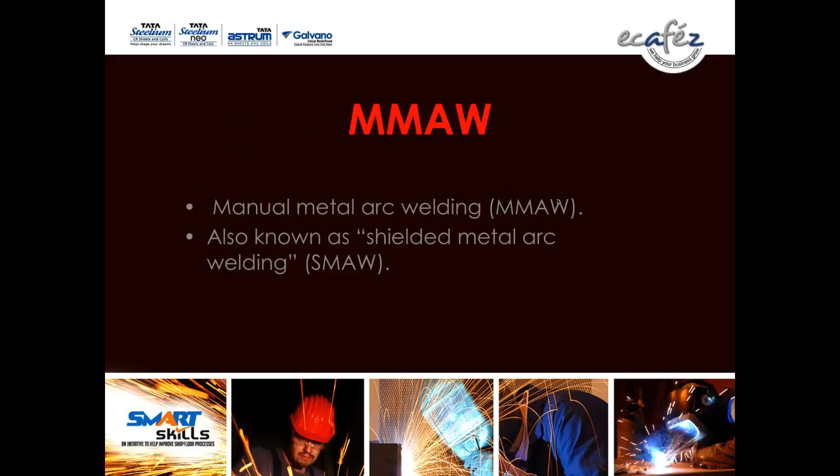Welding skill depends on four essentials of arc welding: correct electrode, correct arc length, correct current and voltage, and correct travel speed. The choice of electrode depends on the diameter of the electrode, mechanical properties of the base metal, welding position, joint type, and current value.

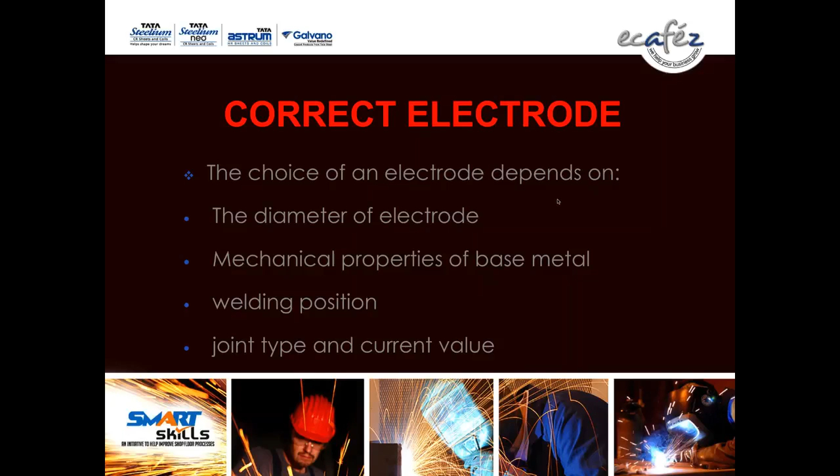Correct electrode, correct arc length. Correct arc length is very important for good quality welding, hence uniform arc length requires a great amount of skill. There is short arc and long arc; the arc length should be ideal.

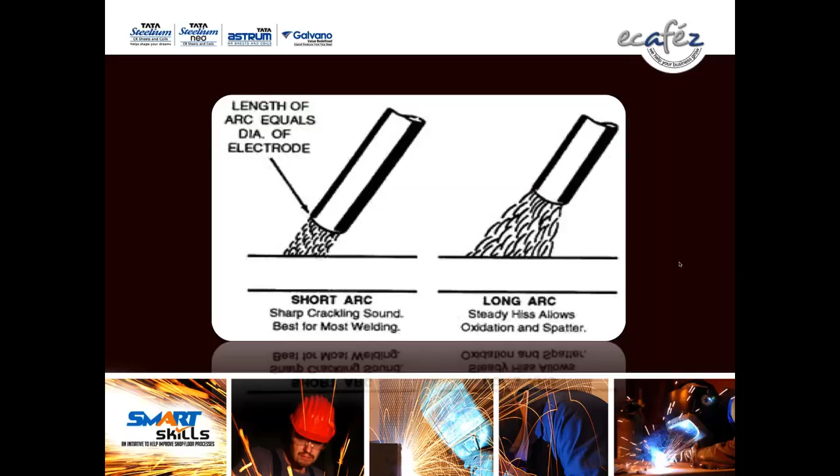With correct arc length: a short arc length reduces the voltage, therefore reduces the heat input, and results in slag inclusion and lesser strength of the weld joint. A long arc length increases the voltage, therefore results in an unstable arc, a flat weld bead with spatter and undercut.

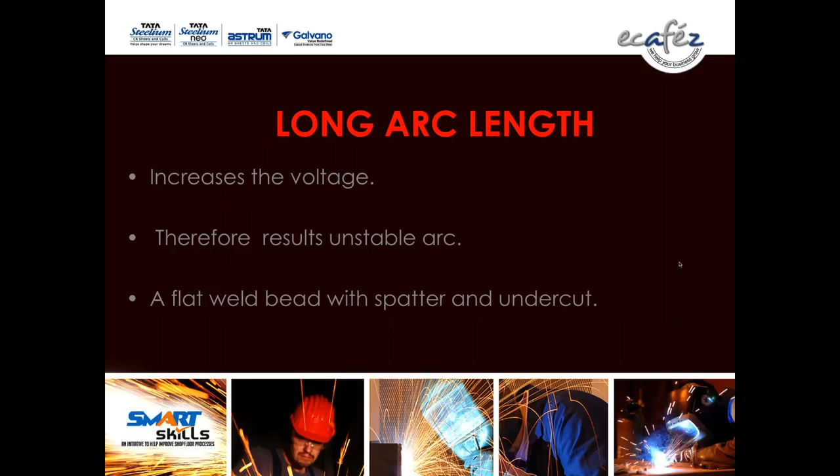If your arc length is correct, the weld joint will have a consistent profile and minimal spatter, good bead appearance, and excellent weld quality. Ideal arc length is 2 to 3 millimeters. Looking at the results: long arc length on the left side, short arc length on the right side, and in the middle the correct arc length, showing the good quality weldment by the MMAW process.

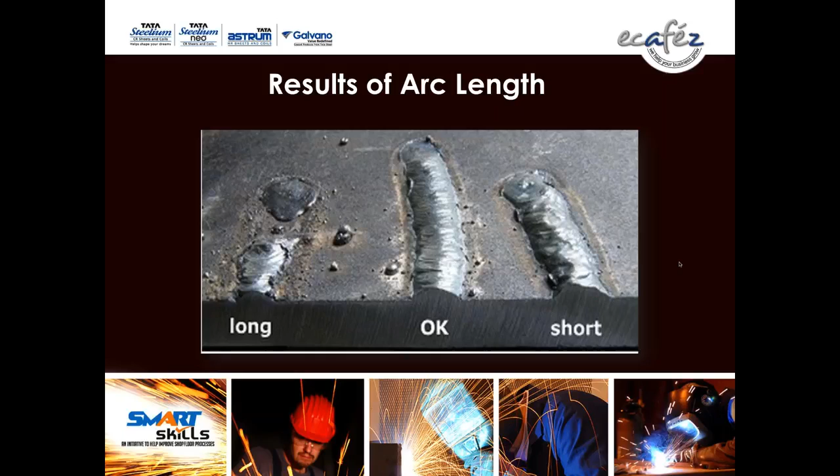Correct current and voltage: these electrical parameters are of great importance in order to get a good quality weldment, and the thumb rule for correct current setting is the diameter of the electrode multiplied by 40, plus or minus 20.

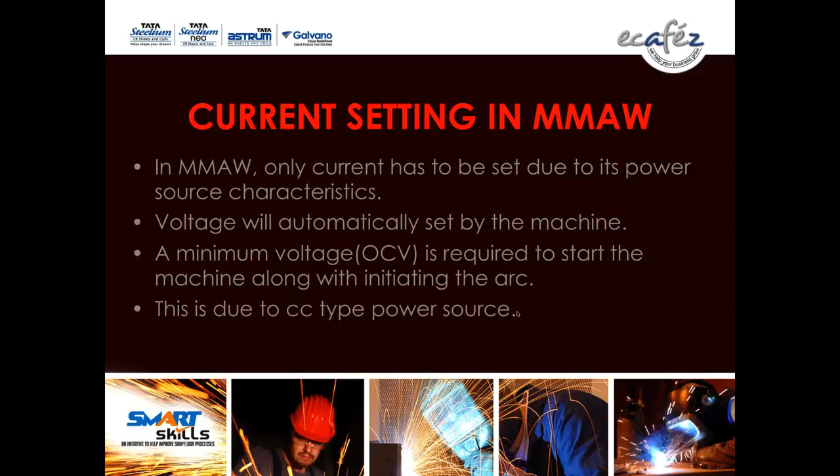Too low current setting results in a narrow bead, and the arc will tend towards one side of the weld, resulting in lack of penetration (LOP) and lack of fusion (LOF). High current setting will result in a wide, flat and irregular bead with possible undercuts. A crater will also form at the end of the joint, and slag will be difficult to remove at the edges of the weld.

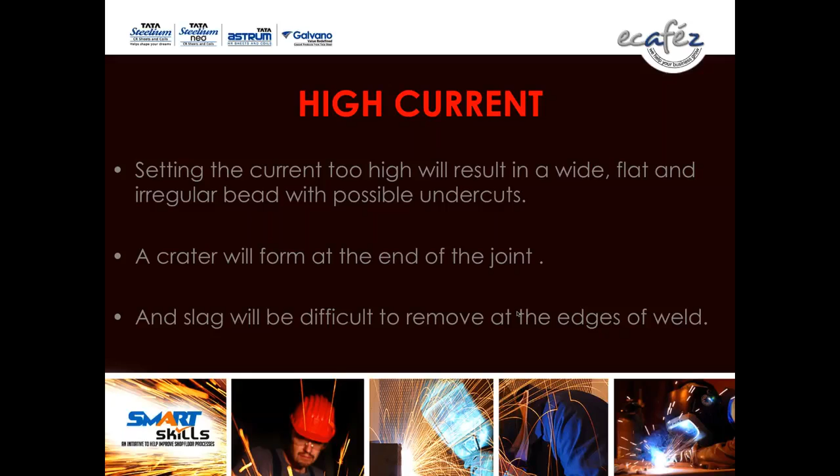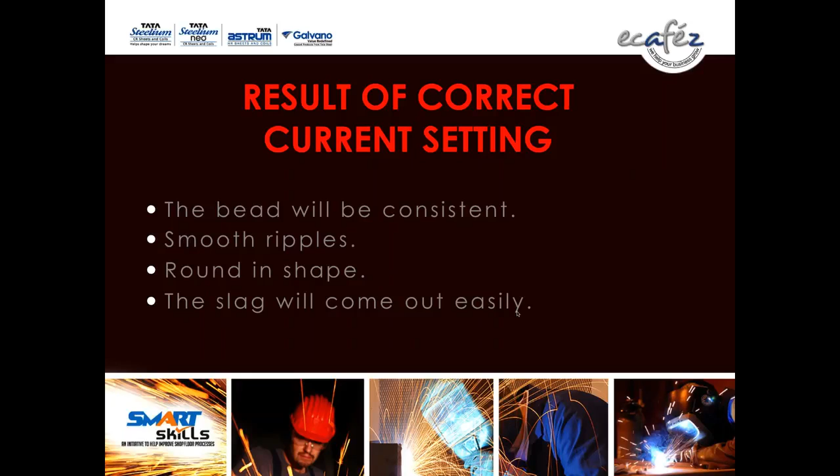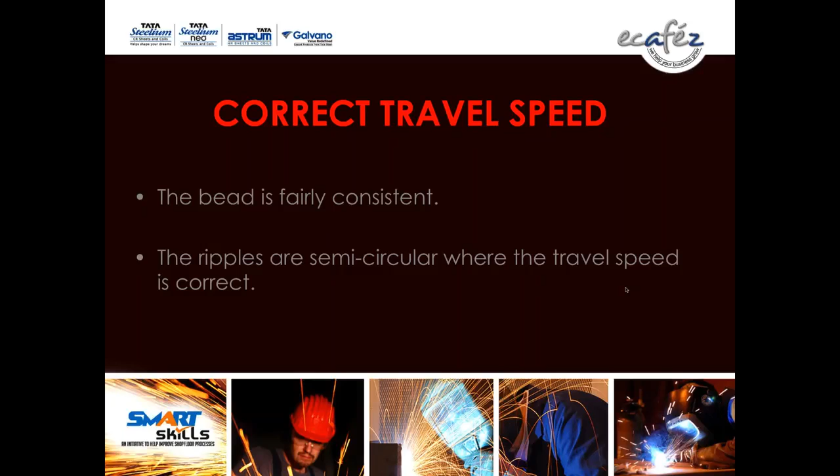Excessive travel speed results in a thin, weak bead. The ripples are elongated and triangular, and an uneven bead will occur.

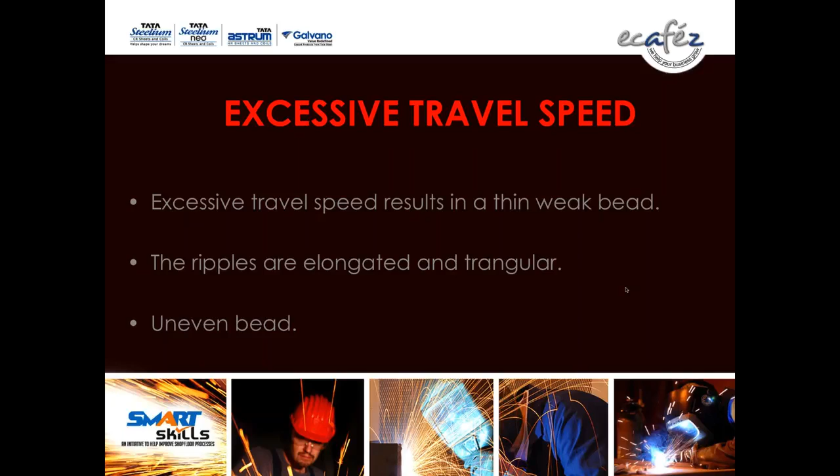Travel speed too low produces an inconsistent bead, with excessive bead height and reinforcement, and a high heat input which will affect the welding properties.

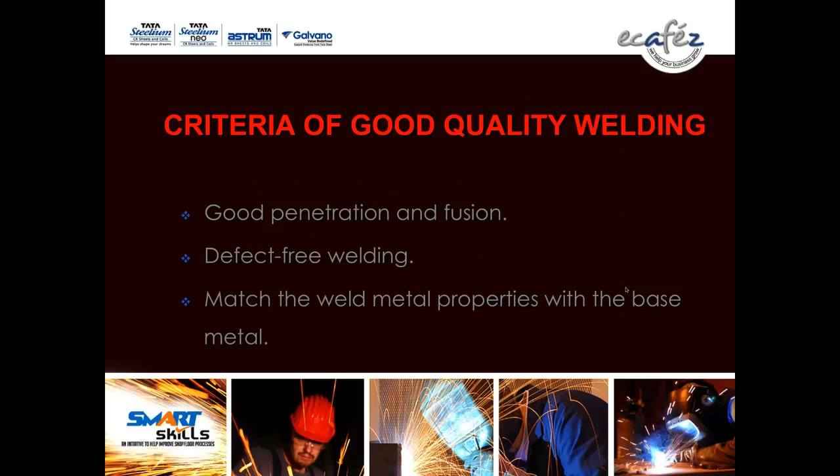Criteria for good quality welding: good penetration and good fusion, defect-free welding, and matching the weld metal properties with the base metal. For the criteria of good quality welding, see what should be the penetration for a good quality joint.

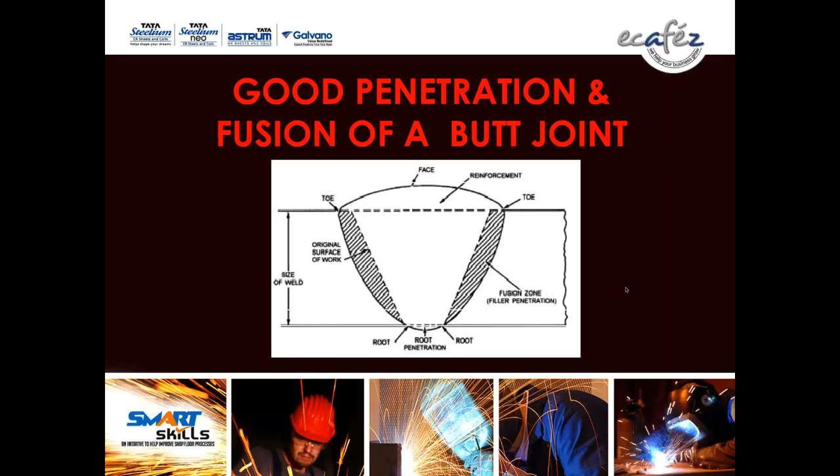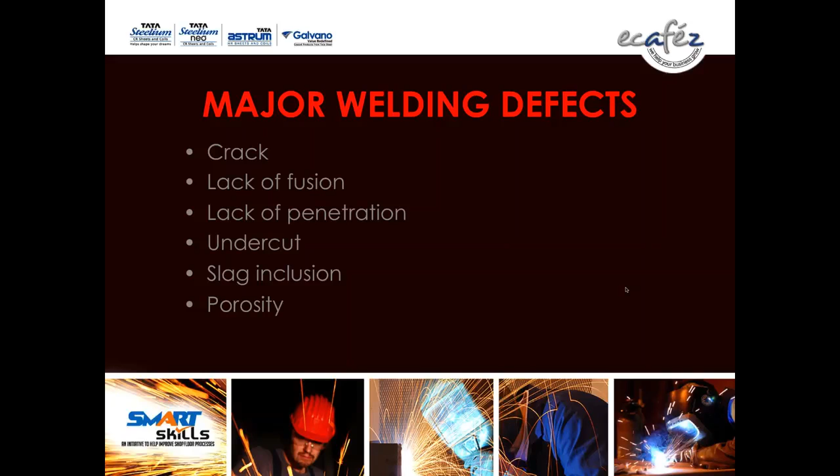Major welding defects, as I have quoted with good fusion and penetration being criteria for good quality welding: the major welding defects are crack, lack of fusion, lack of penetration, undercut, slag inclusion and porosity. These are the major welding defects.

Matching the weld metal properties with the base metal, as I have intimated to you, the quality of a weld joint depends on the matching strength of weld metal in terms of ultimate tensile strength. This is also indicated in many international codes like ASME Section 9, ISO 9606, EN 287 Part 1, API 1104, wherever you go.

Unmatched weld metal is also a reason for failure regarding the bending properties. Passing the bend test indicates the soundness of the weld. This is an example of the AWS classification of electrode.

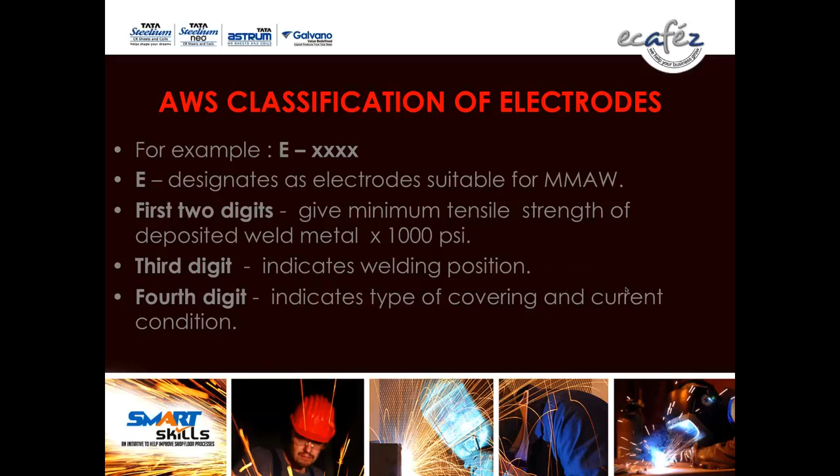It is mentioned on every quality electrode, for example E, then a dash and a 4-digit number, like 6013, 7018, 6011, 6010. E designates an electrode suitable for manual metal arc welding. The first 2 digits give the minimum tensile strength of deposited weld metal in 1000 psi. The third digit indicates welding position, and the 4th digit stands for current condition and type of covering or coating.

Check the example, AWS classification of electrode E7018. E designates electrode. The first 2 digits, 70, indicate ultimate tensile strength of 70,000 psi. The third digit, 1, indicates the electrode can be used in all positions: flat, horizontal, vertical and overhead. The last digit, 8, stands for low hydrogen powder. The coating contains low hydrogen iron powder, and the electrode should be used in DC reverse polarity and AC also.

See the last digit. What is the meaning? If the last digit is 0, high cellulose sodium, and can be used in DCRP, DC reverse polarity. If the last digit is 1, high cellulose potassium, and should be used in DCRP.

If 2, high titanium sodium, it can be used in AC and DCSP also. If the last digit is 3, high titanium potassium is the coating, and this electrode can be used in AC, DCSP and DCRP also. If the last digit is 4, iron powder titanium, it can be used in AC, DCRP and DCSP also.

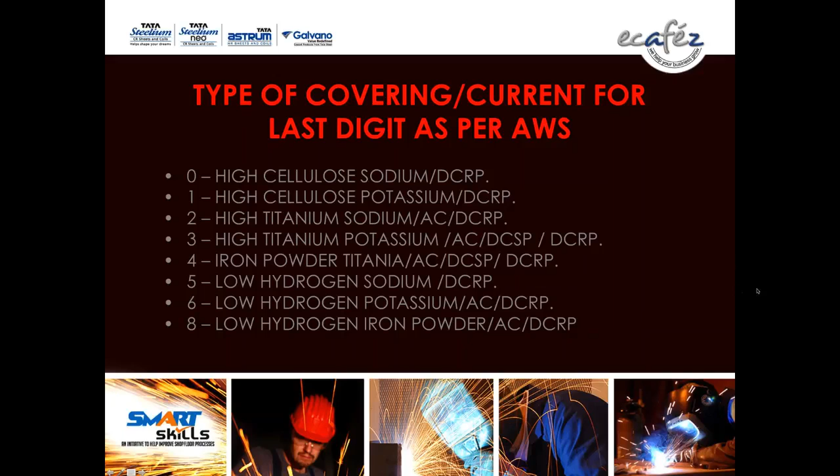Is there any question? What is the reason for short filling? Does current setting change with the change in metal thickness? Yes, it is. It depends on the thickness of the material.

Major welding defects, its causes and prevention. Major welding defects are crack, lack of fusion, lack of penetration, undercut, slag inclusion, and porosity.

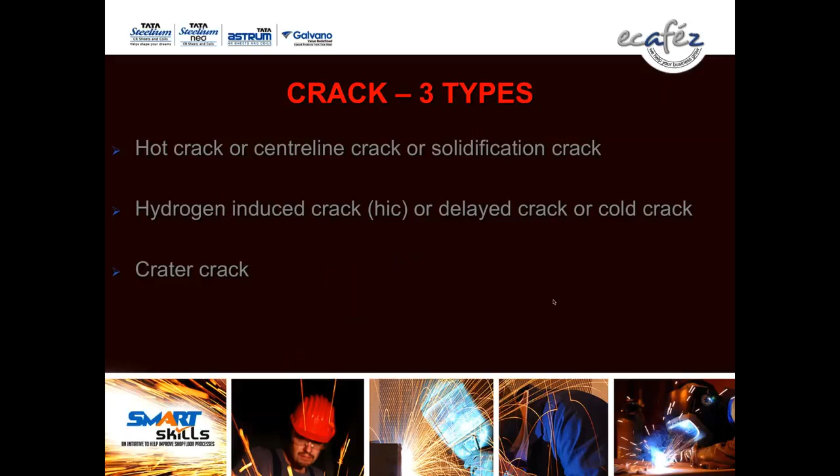Crack may be of three types: hot crack or center line crack or solidification crack. Number two, hydrogen-induced crack, delayed crack, or cold crack. Number three is crater crack.

Causes of hot crack: depth width ratio either too small or too large, high sulfur or carbon content, large root gaps, high heat input.

These are the pictorial views of hot cracks. You see the transverse cracks, toe cracks, underbead cracks, root cracks, and longitudinal cracks or solidification crack.

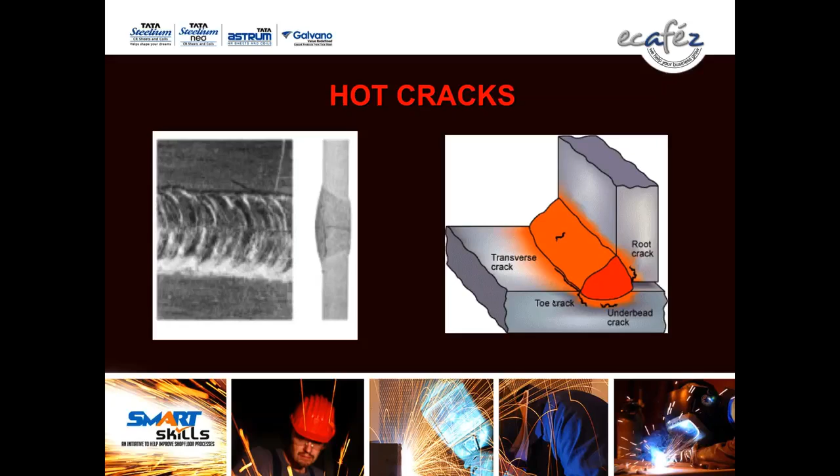Prevention of hot crack: depth width ratio of a butt joint should be 1:1.4. Reduce sulfur or carbon content. Control fit-up to reduce the gap. Reduce arc energy. If you do that, hot crack will be prevented.

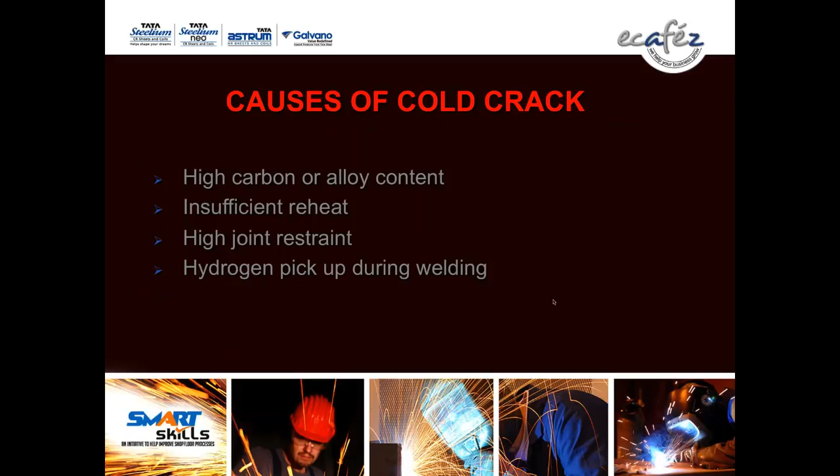Prevention of cold crack: reduce the carbon or alloy content, use preheat, reduce joint restraining, particularly in thicker material, redrying the electrodes. Let's check the question.

The CC type, number one. Yes, the CC type power source stands for manual metal arc welding and TIG welding. CC type, constant current type power source. These are involved in TIG and manual metal arc welding.

Next. Yes, we will be coming for the welding of galvanized steel at the last, at the end. We'll show you.

Why are these cracks observed in MIG welding? So we'll be coming for the MIG process also.

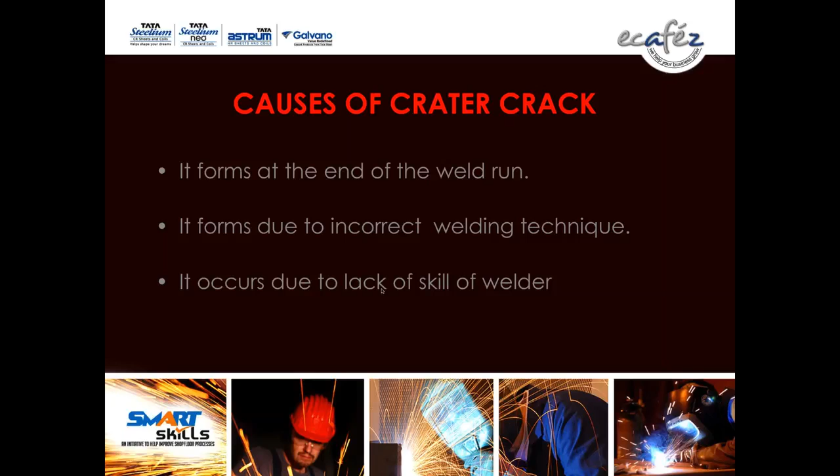Causes of crater crack: it forms at the end of the weld run. It forms due to incorrect welding technique, it occurs due to the lack of skill of the welder.

Prevention of crater crack: to properly weld, the crater should be filled before breaking the arc. This is done by reversing the arc travel direction before breaking the arc. Deposit more weld metal before withdrawal of the arc.

The strength of the weld joint, under any conditions of loading, will be very seriously reduced by the presence of this type of crack in a weld. Under no circumstances should this fault be permitted. There is another question.

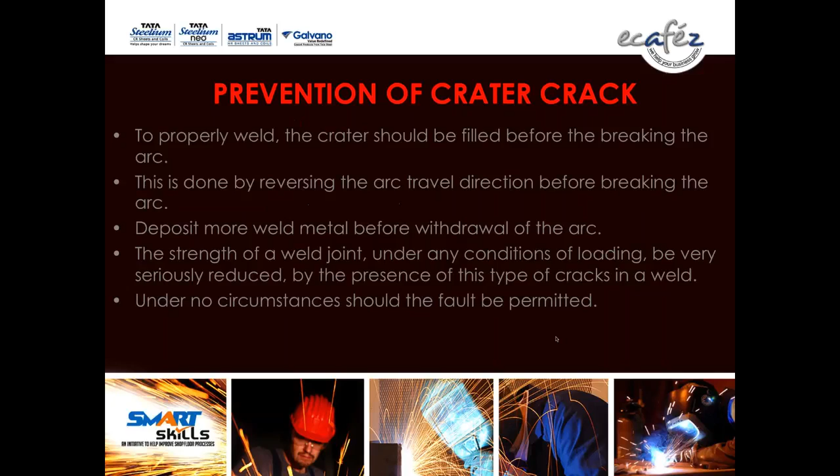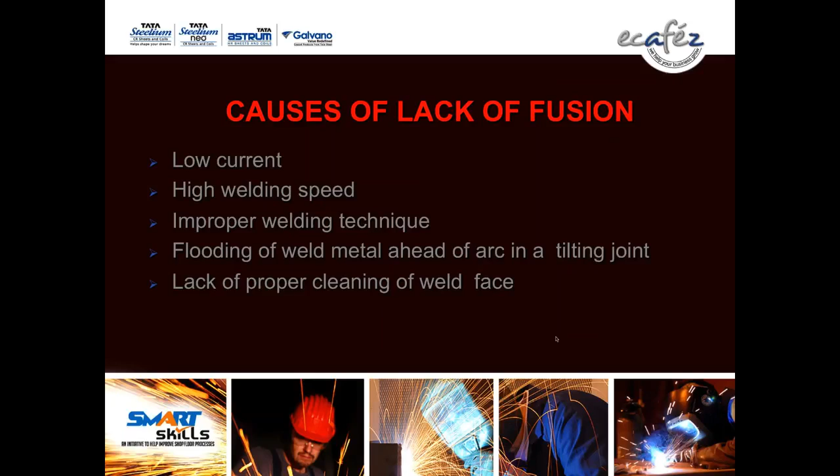Prevention of lack of fusion: use adequate welding current in your joint, reduce welding speed, maintain proper electrode angle. Keep the joint surface in such a manner that it should not be tilted to one side. Deslag each weld pass thoroughly. This is very important: place each weld pass correctly next to each other.

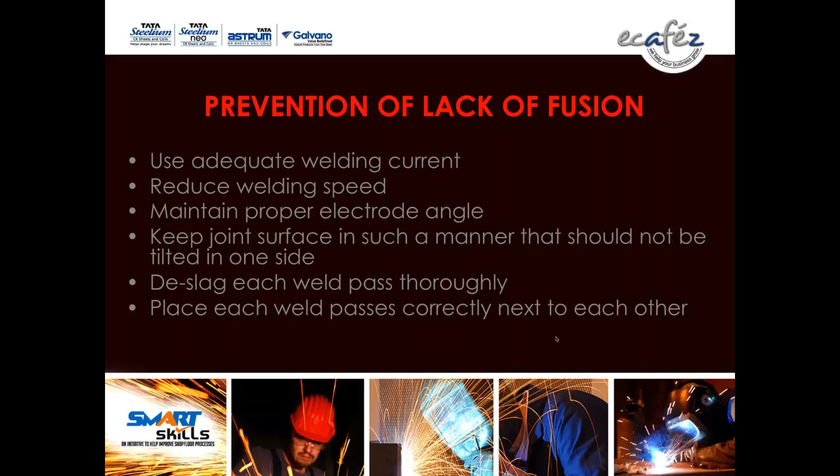Causes of lack of penetration. So first is crack, then lack of fusion, then lack of penetration, chronologically. Lack of penetration causes: the welding speed is too fast, improper joint preparation, insufficient welding current, the electrode used in the root run is too large, long root face, and insufficient root gap are the causes of lack of penetration, LOP.

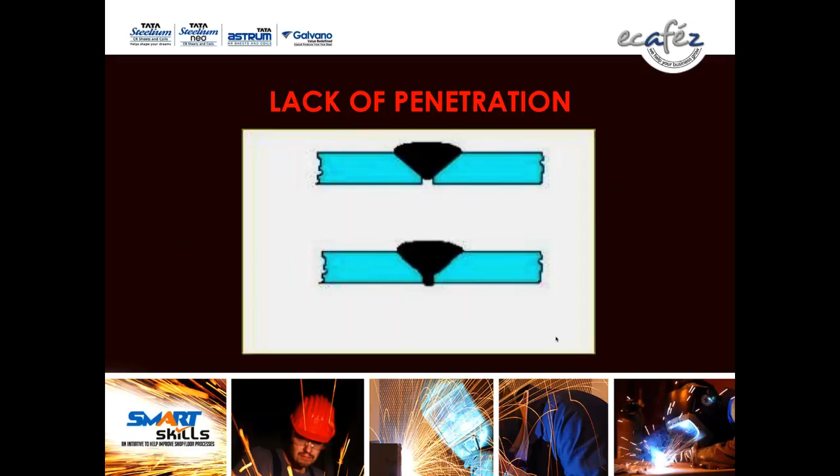Prevention of lack of penetration: do not weld too rapidly. If the speed of travel is too fast, insufficient weld metal is deposited. Use correct joint preparation, use proper welding current, and select the electrode diameter according to the root gap. If your root gap is 2.5, you should use a 2.5 diameter electrode. If your root gap in the butt joint is 3 mm, you should go for a 3.15 mm diameter electrode.

Control fit up, and root gap should be 2.5 to 3 mm. Ideal root face, also called root land, should be 1.6 mm, but it can go up to 2 mm also. Sharp edge preparation should not be given to the welder, otherwise burn through or melt through will occur.

Causes of undercut. These four - crack, lack of fusion, lack of penetration, undercut - are called linear defects. Linear defects are dangerous in welding and are not permitted. Causes of undercut: excessive arc length, high current, high speed of travel, use of damp electrodes, presence of heavy mill scale on the surface, rusty surface, and arc directed to the vertical members of the joint in case of fillet weld.

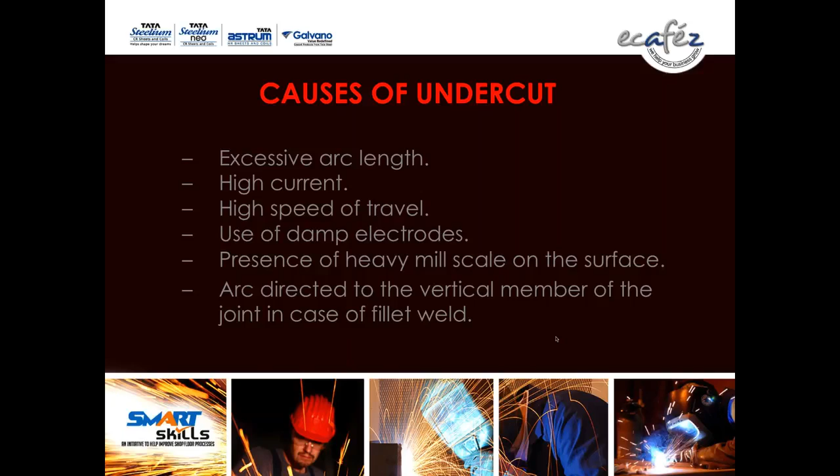Prevention of undercut: keep arc length within 2 to 3 mm, reduce current, check welding speed, use baked electrodes, dress the weld surface before starting the weld. Electrode angle should be 45 degrees during fillet weld. So these four - crack, lack of fusion, lack of penetration, and undercut - are the linear welding defects, which should not be permitted in welding. Next, causes of slag inclusion.

Causes of slag inclusion: inadequate cleaning of each run in multi-run technique, excessive current, long arc length, incorrect joint preparation, and improper welding technique. Actually, the welder is solely responsible for slag inclusion, nobody else.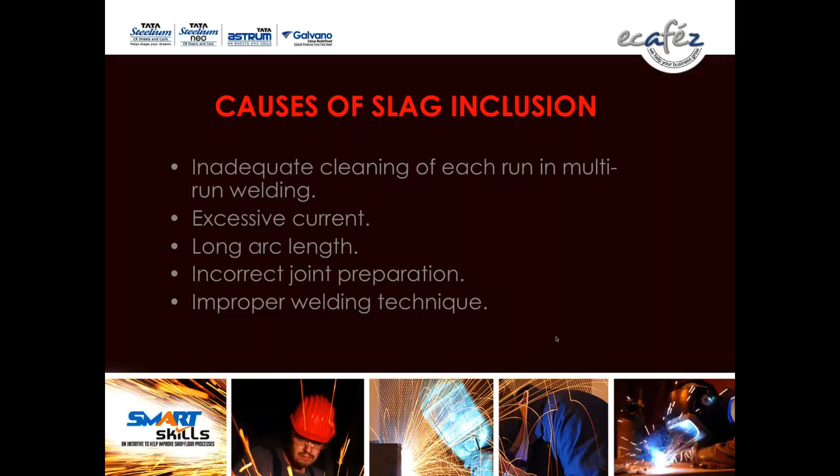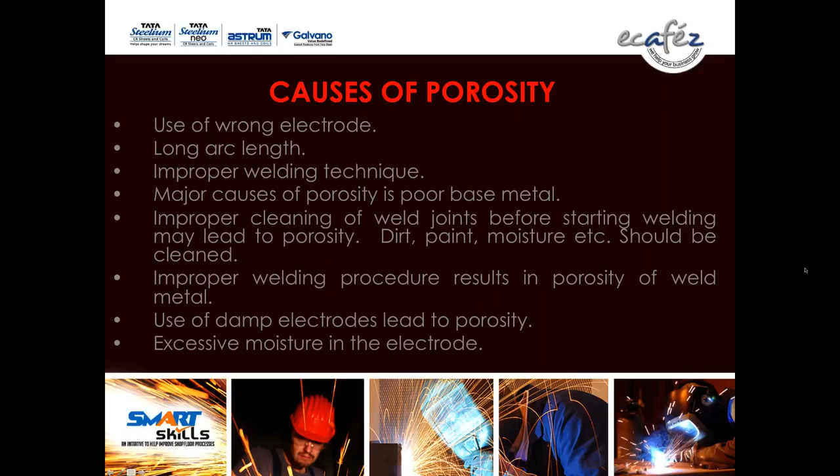So these two are the rounded welding defects. They can be exempted to some extent, but no linear welding defects are permitted in welding.

Next, what is the question?

How does the arc length and torch speed affect the welding? Arc length should be 2 to 3 millimeter for any welding process, TIG, MIG, MMAW. Torch speed should not be very high, should not be very low. The speed should be optimum.

Next question. Can you please explain that 2G topic again? 2G stands for horizontal butt joint. If the butt joint is welded in horizontal position, it's called 2G as per ASME, American Society of Mechanical Engineers.

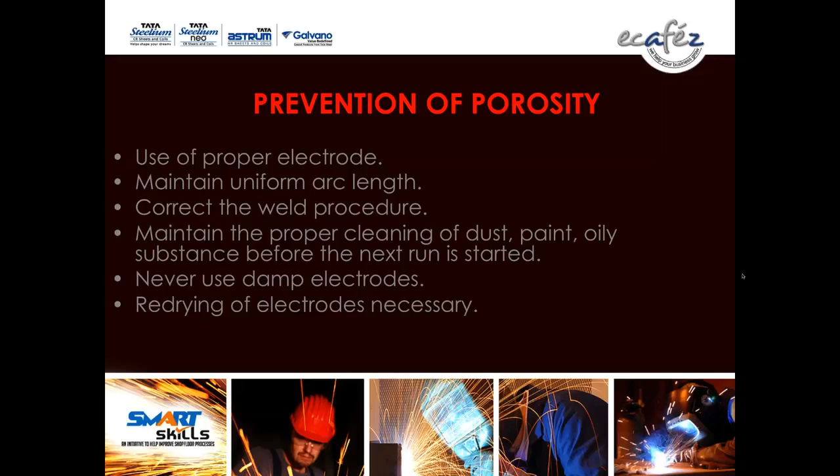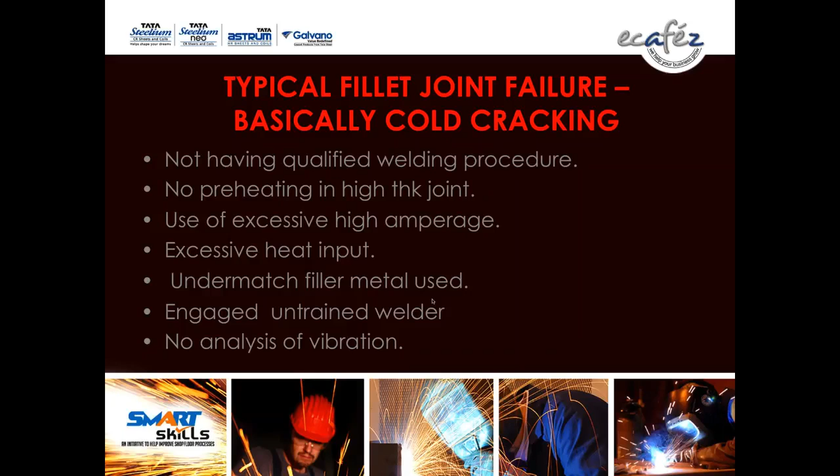No preheating in high thick joint. Use of excessive high amperage. Excessive heat input. Undermatched filler metal. Engage untrained welder for this job. No analysis of vibration. Typical failure.

Failure due to insufficient filling of weld metal before breaking the arc. This is an example for any process. If you go for MMAW, TIG, MIG, this crater crack occurs in every welding joint done by the untrained welder. This shows the reason that filling is not done, insufficient filling at the end of the weld.

Undercut due to use of high current in MIG process. Check the undercut. This is for excessive high current and excessive welding speed.

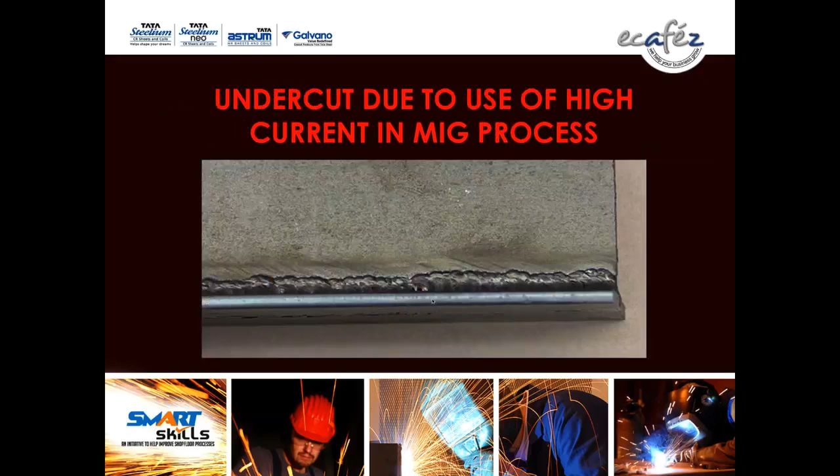Undercut due to use of high travel speed and high current. These are the butt joints. See the pictorial view of undercut. This is for high travel speed and high current.

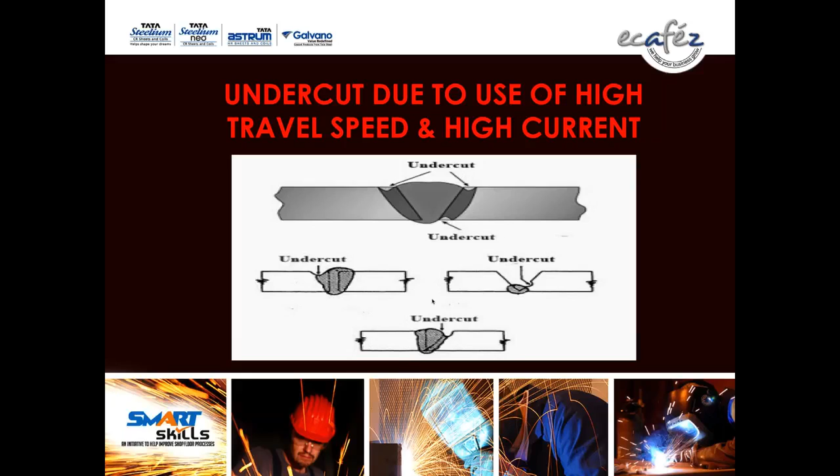Failure in radiographic testing due to scattered porosity in MIG process. This is for lack of cleaning. The joint which is done by MMAW root, then not cleaned properly, and the rest of the runs done by the MIG process but not cleaned properly. So result is the porosity in MIG process.

See the pictorial view. Excessive reinforcement, this is due to very low welding speed in MIG process. So excessive low welding speed will give you a joint like this.

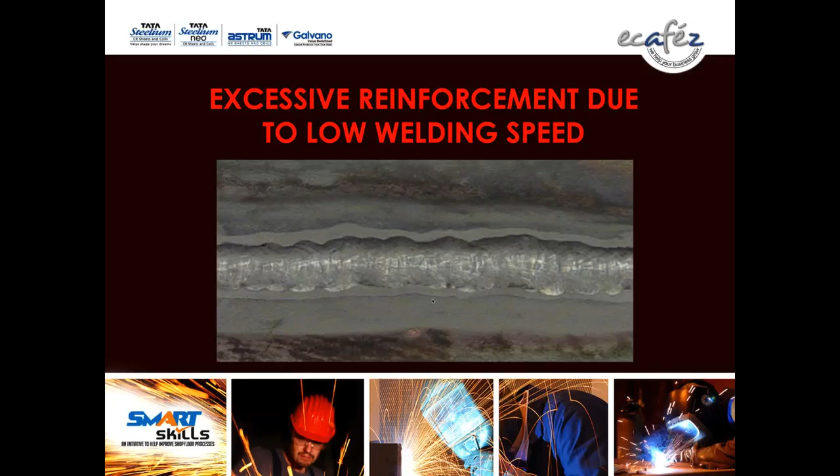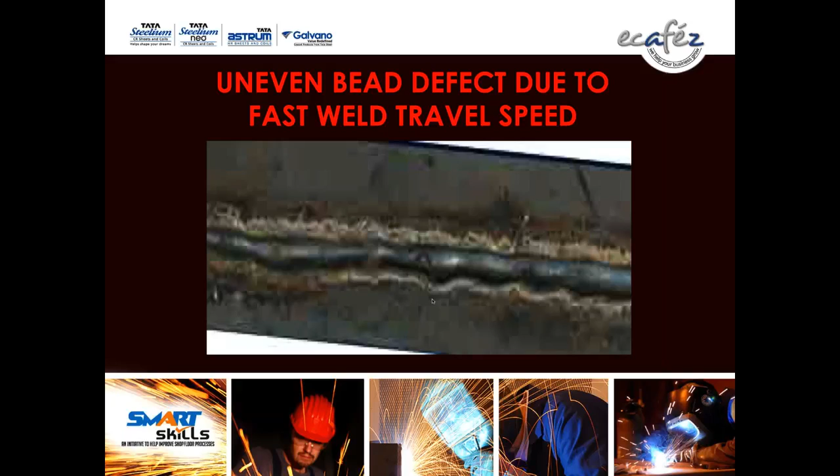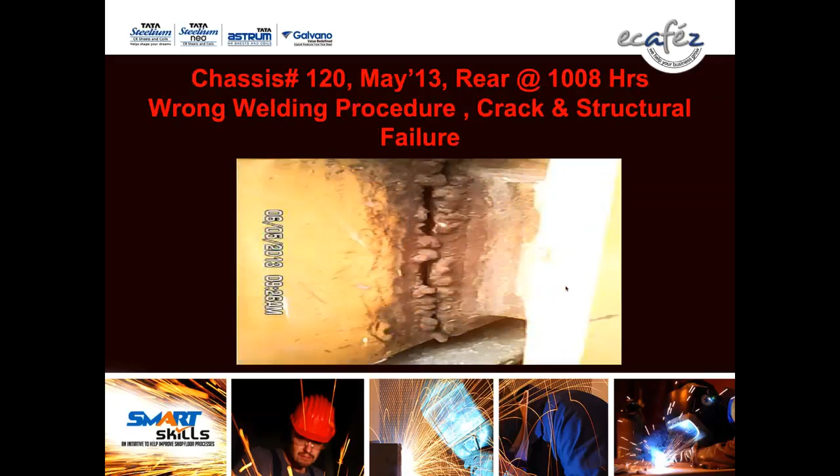This is also a structural failure and welding failure. Crack, this is due to lack of welding procedure, proper welding procedure, lack of proper welder. So this should be avoided.

Next questions. What temperature required?

Oh, please speak in Hindi.

What temperature required? Fit up gap of 2.5 millimeter is suitable for weld bead size. Yes, it is. It is suitable for MIG also. For MMAW, you have to check the root gap, actual root gap in the joint. If it is 2.5 in your root gap, so you should use 2.5 diameter of electrode for getting good penetration and good fusion.

What temperature is required for proper fusion? For mild steel, the temperature required is above the melting point of the material. If the melting point of the material is, for MMAW, 1530 degrees centigrade, you have to go above the melting point.

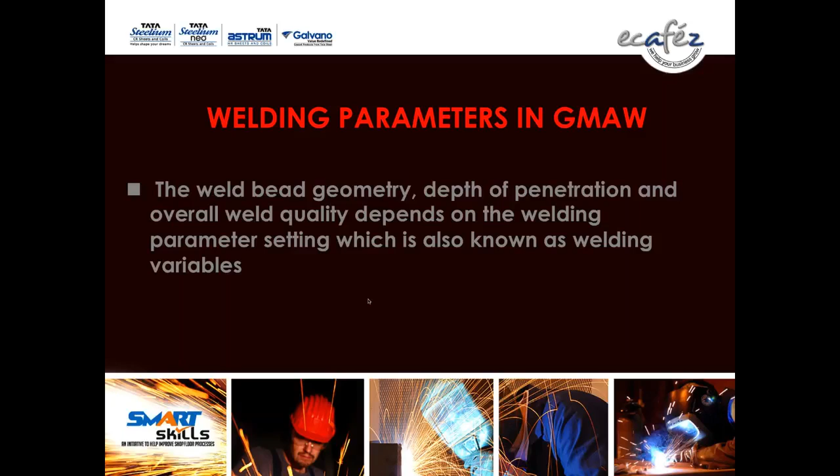Please explain the MIG welding process also — welding parameters and mode of metal transfer too. Next, setting up welding parameters in GMAW. The weld bead geometry, depth of penetration, and overall weld quality depend on the welding parameter setting, which is also known as welding variables. Welding parameters in the GMAW process depend on the following.

Welding current is also related to the wire feed speed. Polarity, arc voltage, welding speed, length of stick out, electrode orientation, electrode diameter, shielding gas composition, and gas flow rate — these are very important parameters in the MIG process.

Welding current, arc force, and deposition rate are dependent on current. Operation above the transition current makes the arc unstable, so please check your current. In the MIG process, there is a transition current range — don't go above the transition range excessively, otherwise your arc will be unstable in vertical and overhead positions.

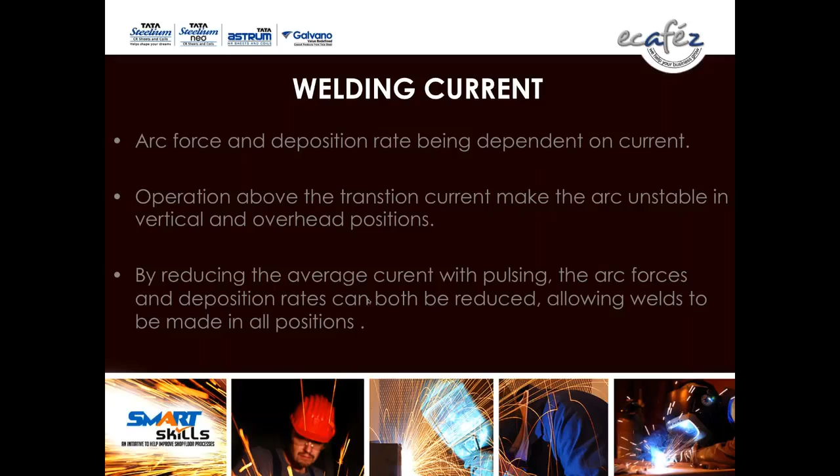By reducing the average current with pulsing, the arc forces and deposition rates can both be reduced, allowing welds to be made in all positions.

With all other variables held constant, an increase in welding current will result in an increase in the depth and width of the weld penetration, an increase in the deposition rate, and an increase in the size of the weld bead. Direct current straight polarity and direct current reverse polarity — these are called polarity.

Polarity may be of two types: DCSP or DCRP — DC straight polarity or DC reverse polarity. DCSP is also called DCEN, and DC reverse polarity is also called DCEP.

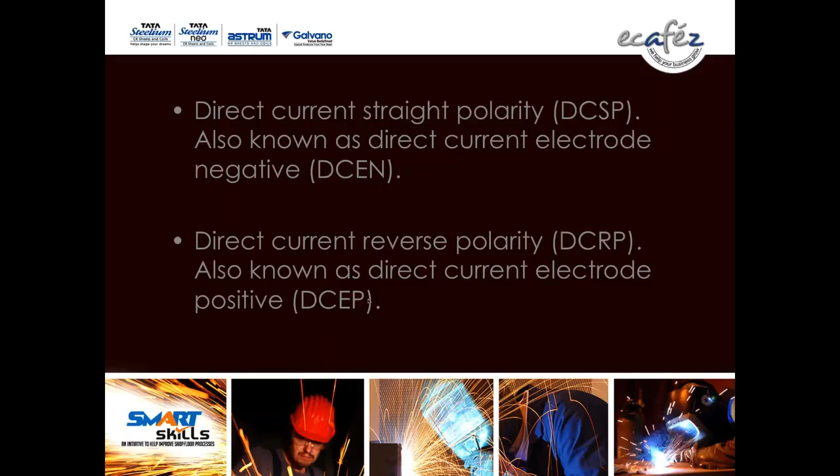That is why DCEP is almost always used in GMAW. The electrode melting rate is much higher in DCEN polarity, but the metal transfer mode is globular, so this polarity is seldom used. AC is not used in GMAW because of the tendency of the arc to extinguish as the current passes through the zero point. So polarity is very important.

Always use DCEP. The majority of GMAW applications use DCEP or DCRP — this should actually be used. This gives a stable arc, smooth metal transfer, good weld bead, less spatter, and high depth of penetration for a wide range of welding current.

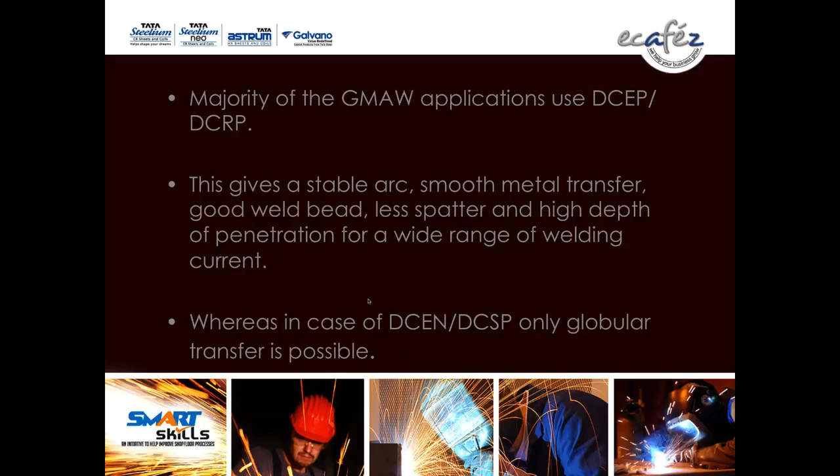Whereas in the case of DCEN or DCSP, only globular transfer is possible — always avoid the globular transfer. The arc length is related to this. The arc length is a critical variable in GMAW; it must be carefully controlled. The arc length determines the current and arc pressure of the weld pool.

When the length is too short, the electrode can contact or short circuit to the weld pool, which will result in base metal melting and a high, narrow weld deposit. On the other hand, excessive arc length causes a wider, shallow deposit, makes the arc wander, increases spatter, and may cause porosity from air entrapment. Arc length is an independent variable in the MIG process.

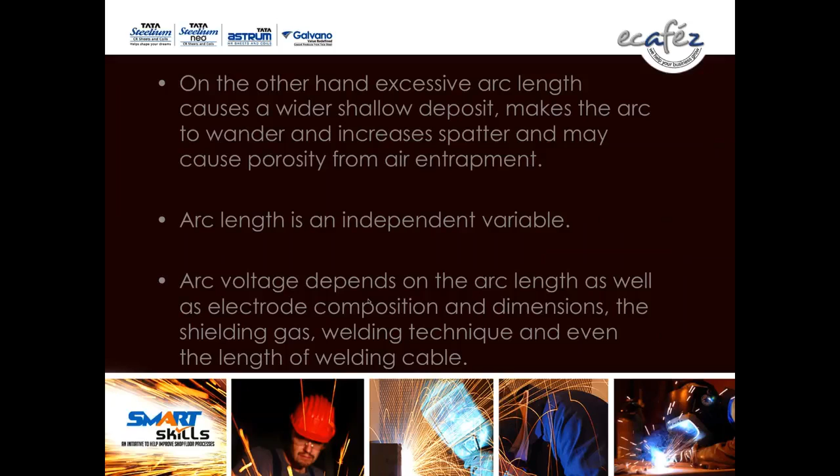Length of stick out is related to this — it is the length of electrode extension from the contact tip to the tip of the weld. This length is called stick out or electrode extension.

A higher length of stick out will offer higher electrical resistance and cause a higher voltage drop. The higher resistance will also cause resistance heating on the electrode, resulting in a small increase in the electrode melting rate.

Length of stick out. What should be the stick out?

However, the increase in the length of stick out increases the overall resistance in the welding power circuit, therefore reducing the welding current.

The power source generally used in GMAW system will be flat or CV type characteristics. As I said earlier, for MMAW the power source should be CC type. For MIG process, it should be CV type characteristics. The electrode feed rate is constant, with this constant potential,

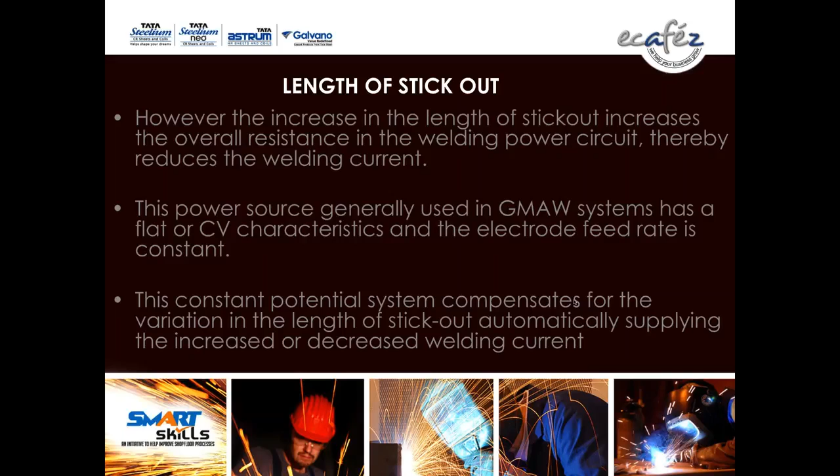So electrode orientation, the angle of the torch, is called electrode orientation. The electrode orientation with respect to the weld joint affects the weld bead shape as well as weld penetration.

Very important. For good quality welding, the main point is good penetration. The influence of the electrode orientation on weld bead shape and its penetration is more than that of the arc voltage or welding speed. The electrode orientation is defined in two ways.

The relationship of the electrode axis with respect to the direction of the weld travel is known as the travel angle or electrode orientation. The angle between the electrode axis and the adjacent work surface is called work angle.

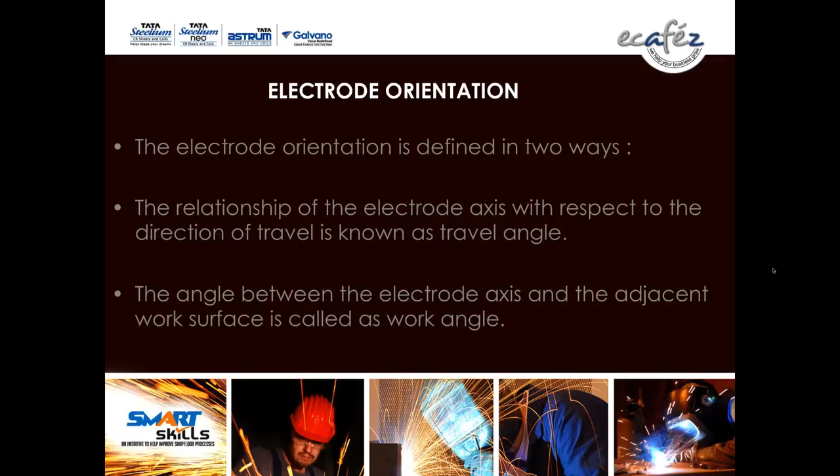When the electrode points against the direction of travel, the technique is called backhand welding technique with a drag angle. When the electrode points in the direction of travel, it is called forehand angle with a lead angle.

The primary function of gas shielding, composition of gas shielding.

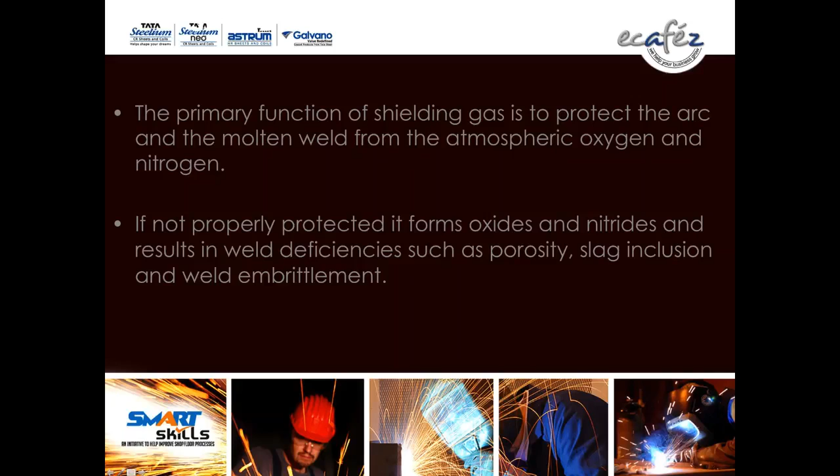How to avoid spatter problem in projection bar welding - are you using electric resistance welding? So there is no spatter. Do you use MIG welding process? Then spatter can be reduced by using argon CO2 82 to 18%. Then it can be reduced if you set the parameters properly. Welding parameter setting is very, very important.

Next one, shielding gas composition. In addition to this, the shielding gas performs a number of important functions, it forms the arc plasma.

Stabilizes the arc root on the material surface and ensures the smooth transfer of the molten metal droplets from the weld pool.

Shielding gas composition and its flow rate have a substantial effect on arc characteristics, mode of metal transfer in the MIG process, penetration and weld bead shape, welding speed for good production, undercutting tendency, cleaning action, and weld metal mechanical properties. All are very important in selecting shielding gas composition.

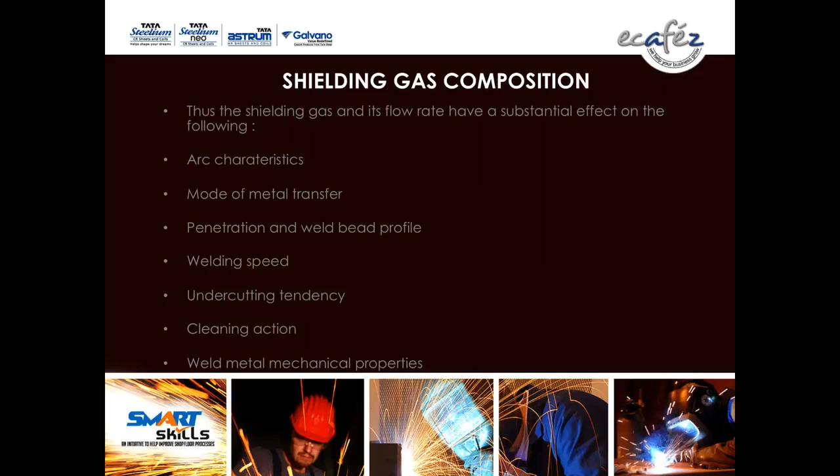Shielding gas composition: the principal gases used in the GMAW process. CO2 can be used for steel. Argon-CO2 can also be used for steel: 80% argon, 20% CO2. For better quality weld, use 82% argon, 18% CO2.

Argon-CO2-O2 mixture is also available: 90% argon, 8% CO2, 2% oxygen. It can be used for steel as well, for getting good quality product.

Argon plus oxygen, 98-2% or 99-1%, can be used for stainless steel in the MIG process. Argon, helium, or argon-helium mixture should be used for non-ferrous material in MIG process.

Check the gas flow rate. For argon or argon-based mixture in MIG, it should be around 15 liters per minute. But for helium, it should be double, because the density of helium is less compared to argon. So for argon, around 15 liters per minute, but for helium it should be minimum double due to its lower density.

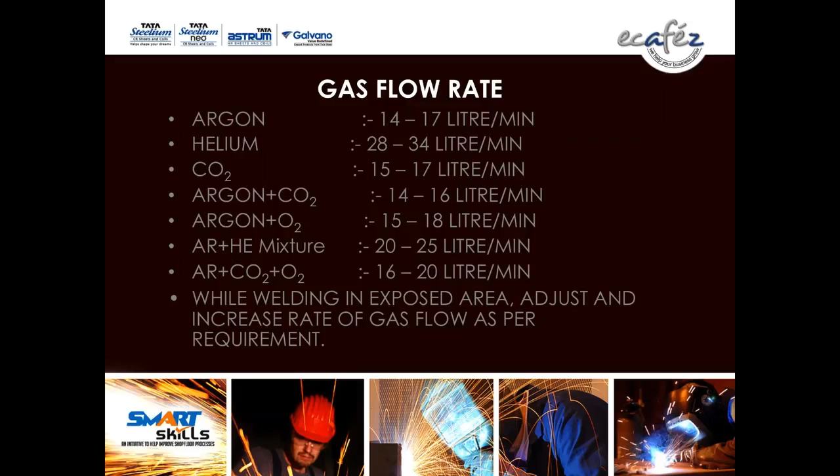Welding of galvanized steel. Somebody was asking about welding galvanized steel. It is done almost exactly the same way as welding bare steel of the same composition, using the same welding processes: MMAW, MIG.

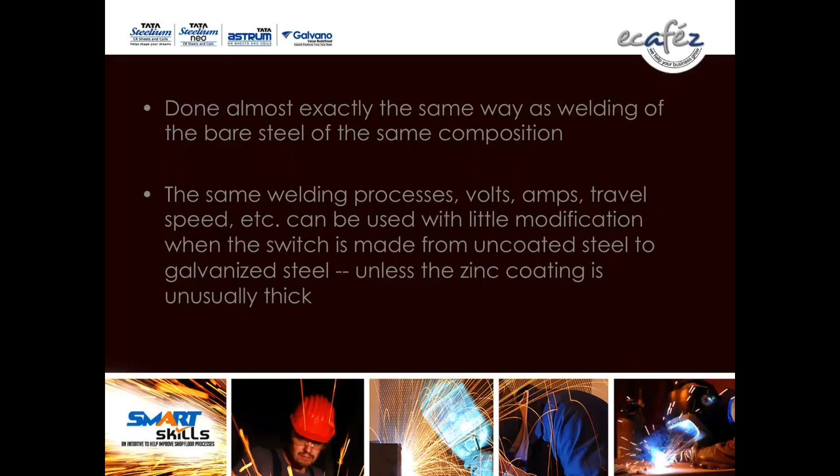These processes can be used with volts, amps, travel speed, etc., with little modification when switching from uncoated steel to galvanized steel, unless the zinc coating is unusually thick.

The difference between welding galvanized steel and uncoated steel results from the low vaporization temperature of the zinc coating. Zinc melts at about 787°F and vaporizes at about 1650°F. Since steel melts at about 2750°F and the welding arc temperature is 15,000 to 20,000°F, the zinc near the weld does not stand a chance - it vaporizes.

The vaporized zinc increases the volume of welding smoke and fumes. The zinc near the weld is burnt off by the heat of the arc, removing the protective zinc coating. Grind off the zinc at the weld interface if required and if your welder is skillful and knowledgeable, and wear a suitable breathing mask, because galvanized fumes are lethal.

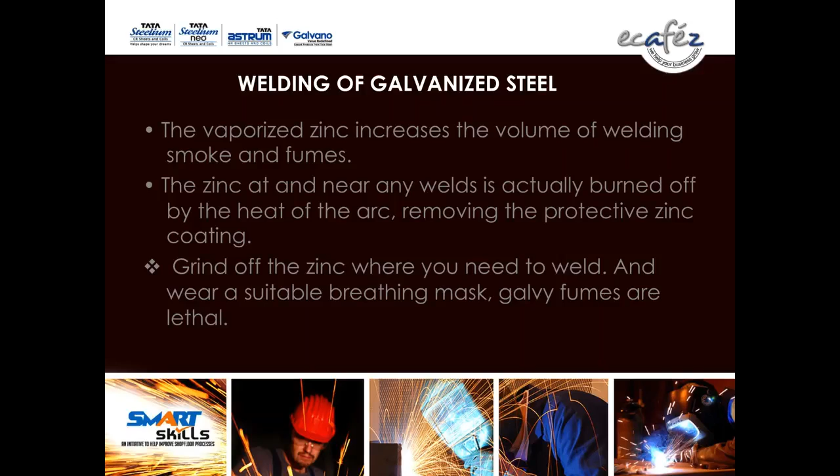The welding engineer should also check the welding electrodes for high silicon levels. Excessive silicon can cause zinc to penetrate the weld metal, leading to cracking, especially when the zinc coating is thick. Silicon in the welding electrodes should not exceed 0.85%. This means the commonly used ER70S6 filler wire should not be used when welding galvanized steel.

Best welding practices for galvanized steel: for manual metal arc welding, you can use E6011, E6012, or E7016. For MIG, you can go with gas metal arc welding using E70S3. Do not use E70S6, you have to use E70S3. The best results for galvanized steel welding will be given by ER71T14.

You can weld all your joints using the flux core arc welding process as well as flux core wire E71T14.

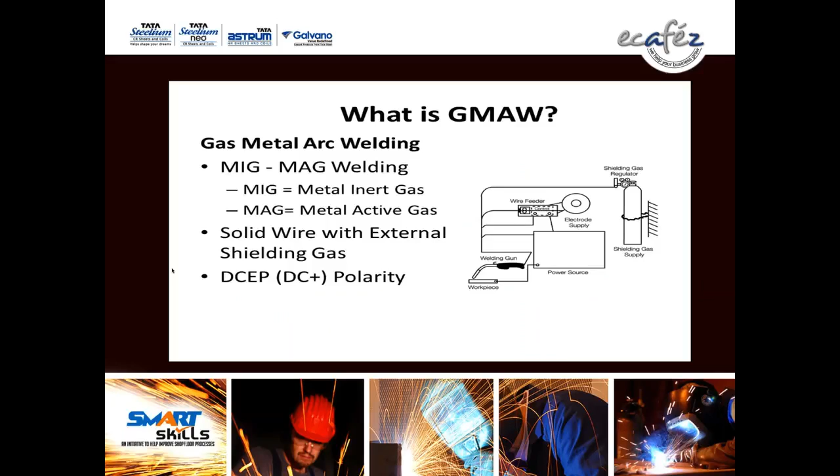Gas metal arc welding, also known as metal inert gas welding - MIG process - or metal active gas welding, where you use CO2 gas. What is GMAW? GMAW is also called MIG-MAG, and should be used in DCRP polarity. Check the process: arc length, solid electrode wire, shielding gas, wire guide. The contact tip, in the pictorial view, is the wire guide used in the MIG process.

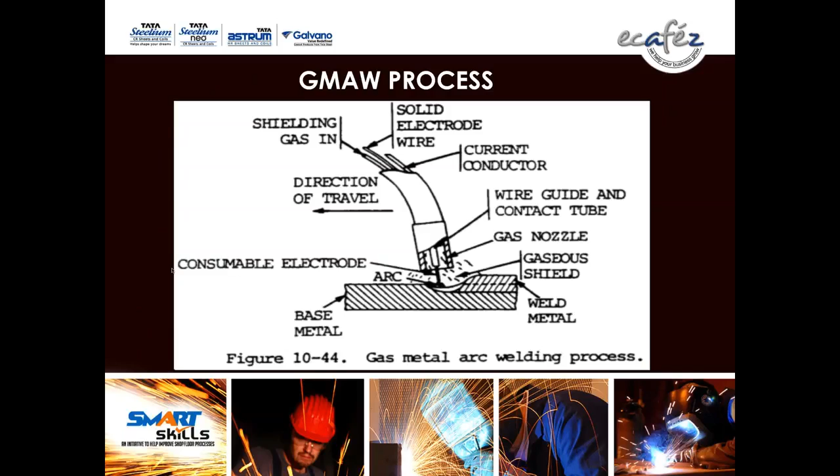Mode of metal transfer in GMAW: short circuit transfer, also called dip transfer, then globular transfer, then spray transfer. The best transfer in MIG process can be achieved by using spray transfer - don't go for globular transfer. And pulse spray transfer - these can be available only in the special type of machine.

Mode of metal transfer in GMAW: check short circuit transfer or dip transfer, globular transfer, spray transfer - these three transfers can be available in any MIG process. But pulse transfer is only available in pulse type power sources, and the best transfer is spray transfer. So always check the pictorial view.

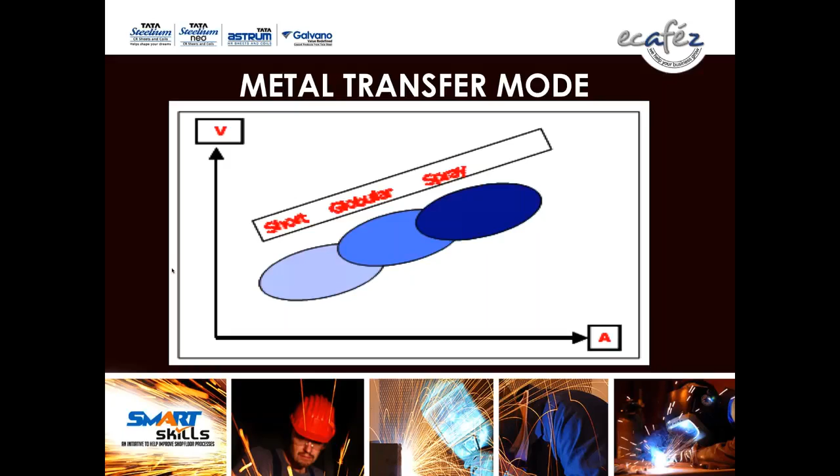When you increase the current and voltage from short circuit to globular, transfer will be available. Then if you again increase the current and voltage, you can get the spray transfer. See the pictorial view in mode of metal transfer: short circuiting transfer, globular transfer, and spray transfer. Spray transfer is the best transfer in MIG process if you use argon CO2 shielding gas. Short circuiting transfer is like this.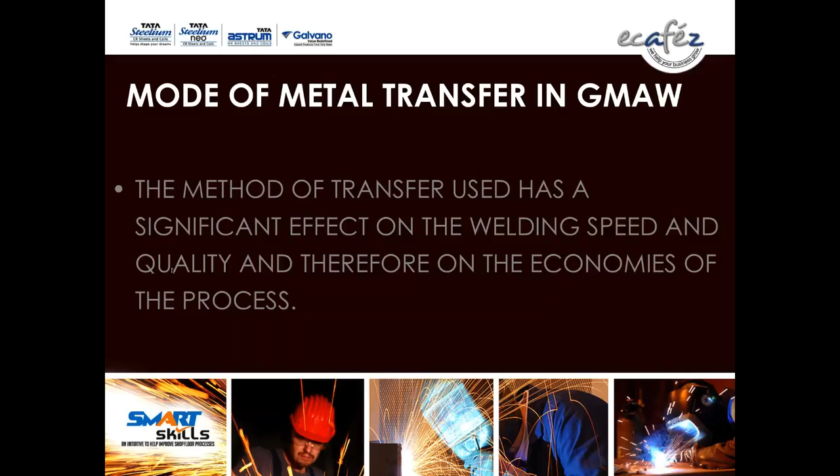Mode of metal transfer in GMAW. The method of transfer used has a significant effect on the welding speed and quality, and therefore the economies of the process.

What should be the minimum penetration for good strength in MIG welding? As per ASME Section 9, QW 403.3, the international code, it should be minimum 5% of the thickness of the material, maximum 10%. There may be some addition or alteration depending on the direction given. You can check in ASME Section 9 QW 403.3.

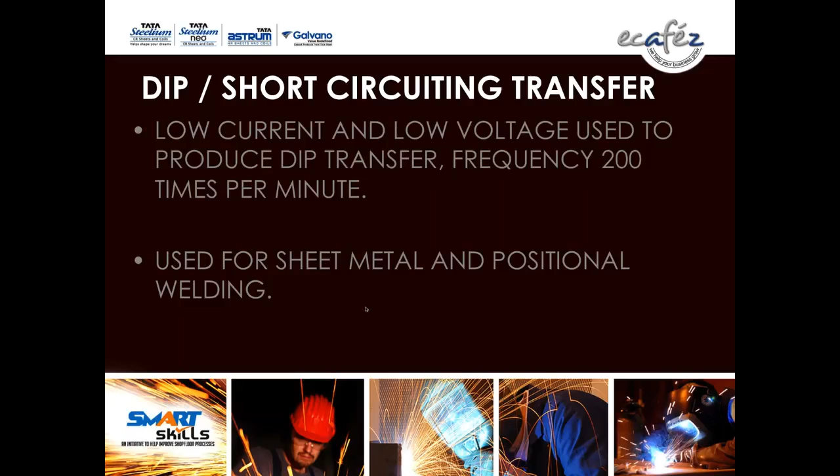Dip transfer uses low current and low voltage, has a short circuiting arc, low spatter with controlled heat input, suitable for thin sheet and out of position welding, that is vertical welding.

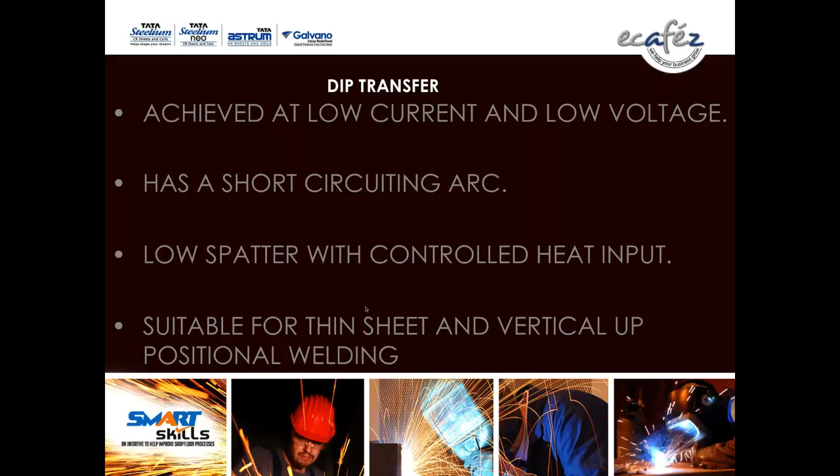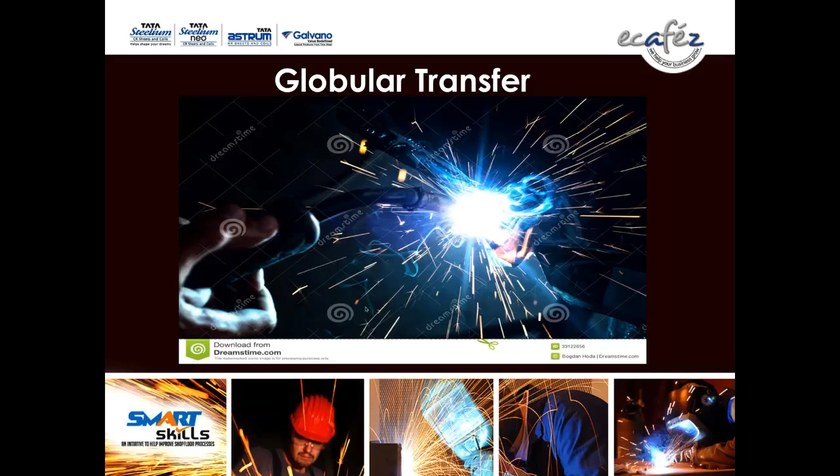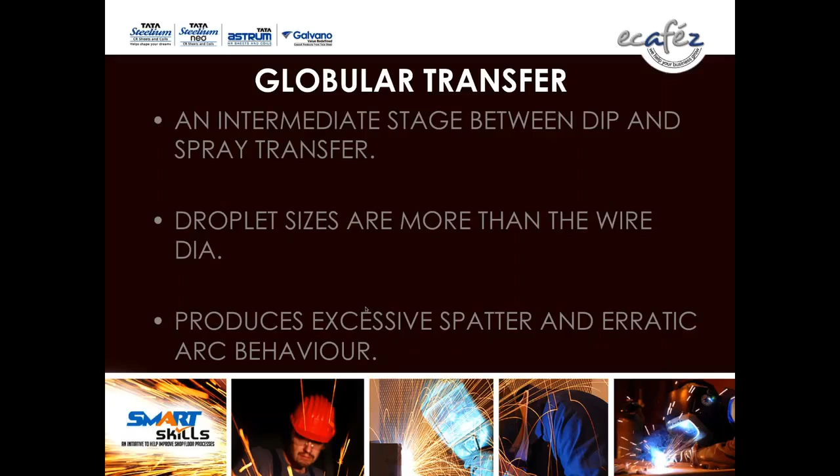Check the globular transfer, always avoid this transfer. For the MIG process, go for dip transfer or spray transfer wherever possible, don't go for globular transfer, avoid it. For the quality of welding, you do not get a quality weld by using globular transfer. In globular transfer, 8 to 10% of weld metal will be lost, and there is an erratic arc. This is the pictorial view of globular transfer: erratic arc, you never get good quality weldment by using it. Globular transfer is an intermediate stage between dip transfer and spray transfer. Droplet sizes are more than the diameter of the electrode, which produces excessive spatter and erratic arc behavior. You will not get good quality.

Spray transfer, like a spray of water, will give you the best results. Higher current and voltage can give you spray transfer, the best transfer in the MIG process. Droplet sizes are the same or lower than the wire diameter, which is 1.2 or 0.8. If the droplet size is lower, the quality of weld will be finer, with a higher deposition rate available. Penetration will be very good, and the fluidity of the molten pool increases the productivity by using spray transfer.

Globular transfer CO2 welding will give very bad quality weld. Spray transfer is achieved only with argon based mixture at higher current and voltage. True spray transfer is not available by using CO2, only available by using argon CO2.

It gives very smooth arc and minimal spatter. I can give you the technique - it can give you zero spatter also. For MIG welding using CO2 gases, your weld metal loss will be 8 to 10%. But with spray transfer using argon CO2, your spatter loss will be almost zero.

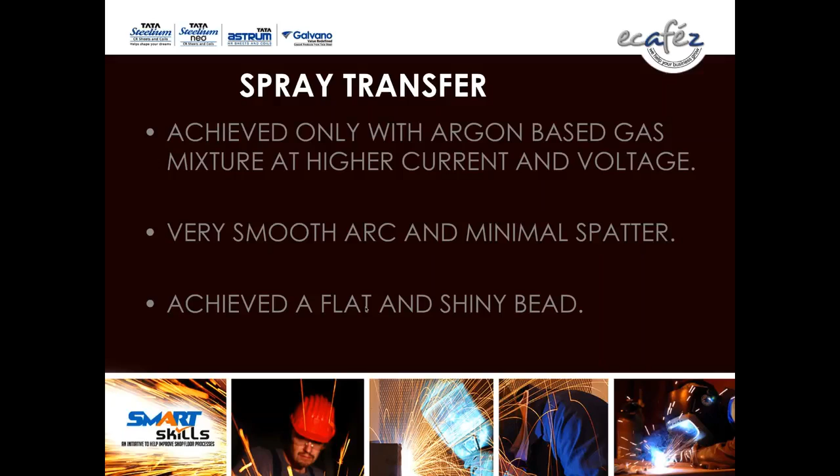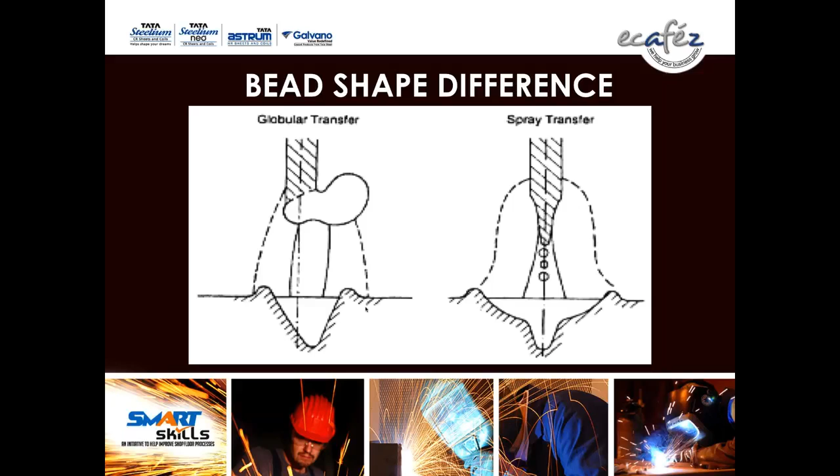But by using globular transfer, your joint strength will be reduced, the bead appearance will be very bad, and good penetration will not be available. So always go for dip transfer or spray transfer. Don't use globular transfer.

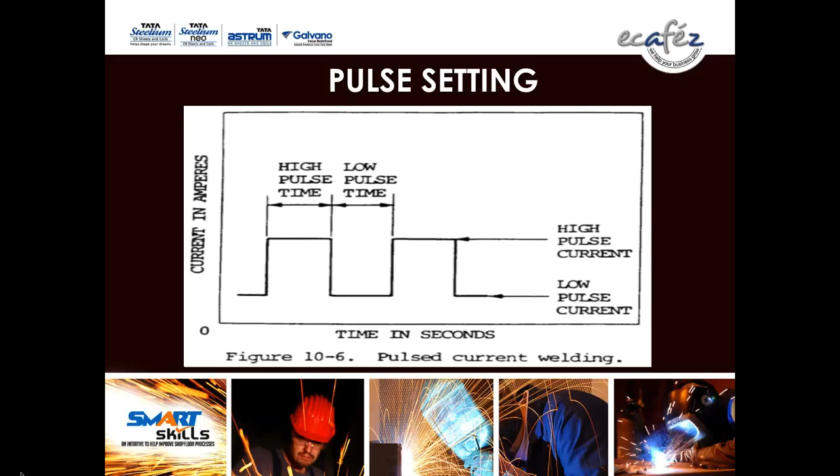If you have a pulse machine, there will be a very good quality weldment using pulse type power sources. Pulse transfer control method of transfer mode gives extremely precise control of weld metal transfer and penetration to give you superior quality weld. Heat input to the job is controlled by the low background current with high pulses using special type of equipment. So high pulse is the best pulse.

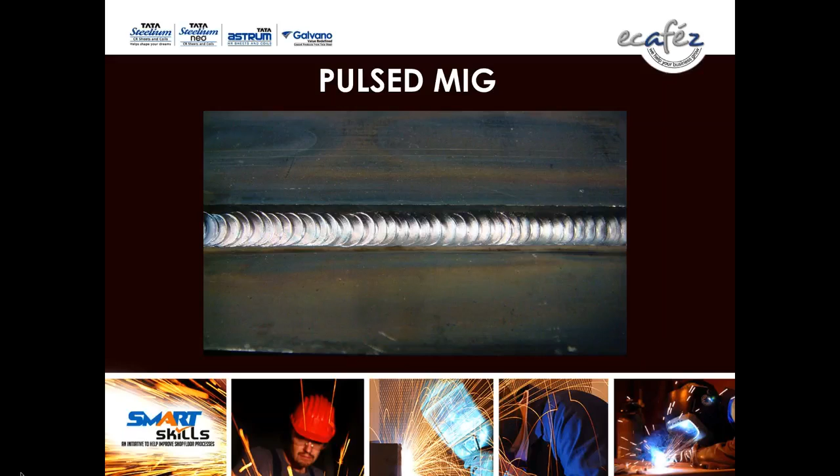This is the pulse mode MIG welding. So pulse setting - this is a welding which is available in pulse type power sources in MIG process. Check the welding, see the welding - a unique type of welding is available by using MIG process.

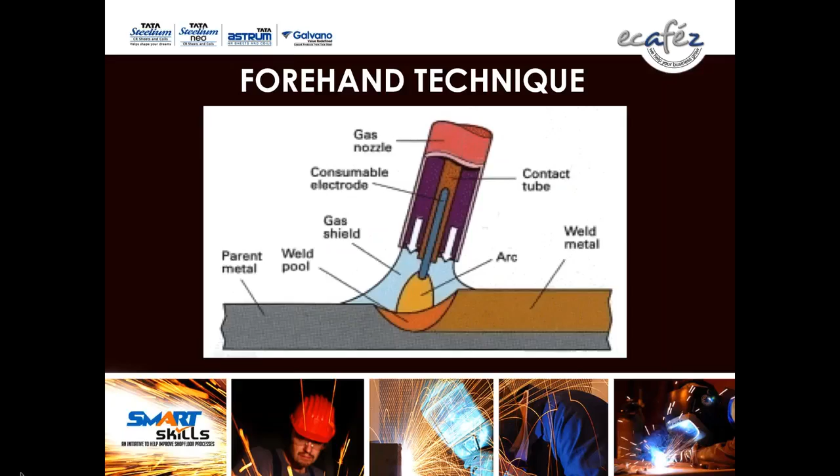The effect of CO2 and argon gas is very important.